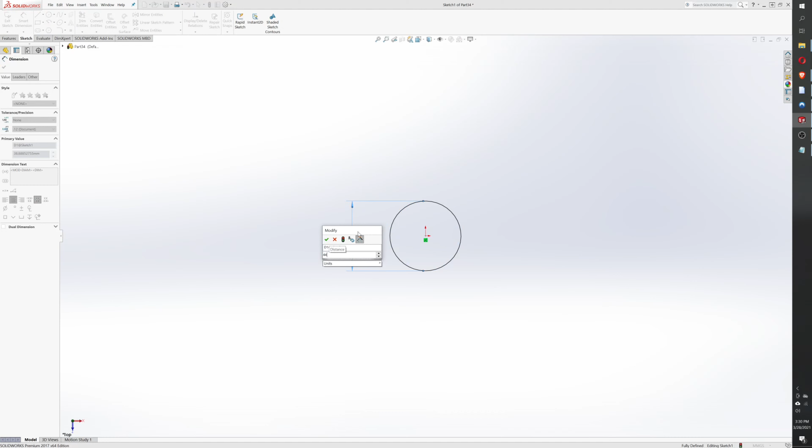Alright, so we're going to start by sketching out the shape that we want, which is going to be a cylinder. So I go to the top plane, draw a circle. I want this to be 44 millimeters in diameter and 200 millimeters tall, so we'll extrude it by that much. And that's going to be our rough shape.

Now I want to build some channels along the edges of this so that I have something to feed my tubes into, but I don't know exactly where I want them yet. So what I'm going to do is start by sketching a circle here. This is just temporary. This is to represent the interior of the container once I hollow it out. Then I'm going to sketch another circle here, and this represents the interior of the channel that I'm building, which is going to be 6 millimeters.

And what I want is for this to just barely intersect this. And the idea is I want there to be a little gap in the wall between the main chamber and these chambers, but not to have that gap big enough to pull the tube through. And I'm really just eyeballing this and seeing what looks right. So I just want this to be very small, a little bit further than that.

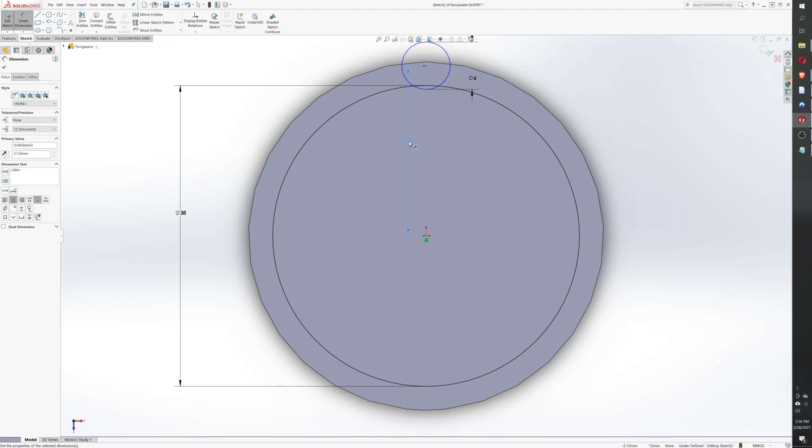Alright, 21.5 looks good. So I no longer need this circle. We'll get rid of that. And that got rid of my measurements, so I'm going to put that back in. And 6 millimeters was the interior. The exterior is actually 12 millimeters, so I'll do that. So I don't want to just extrude this down because I want it to curve in.

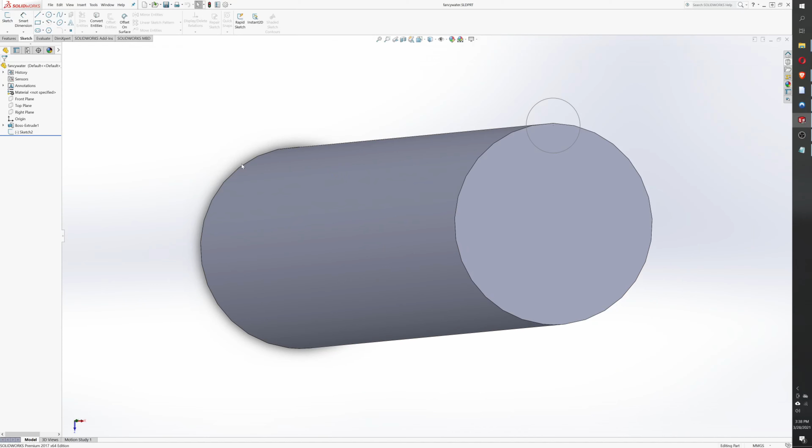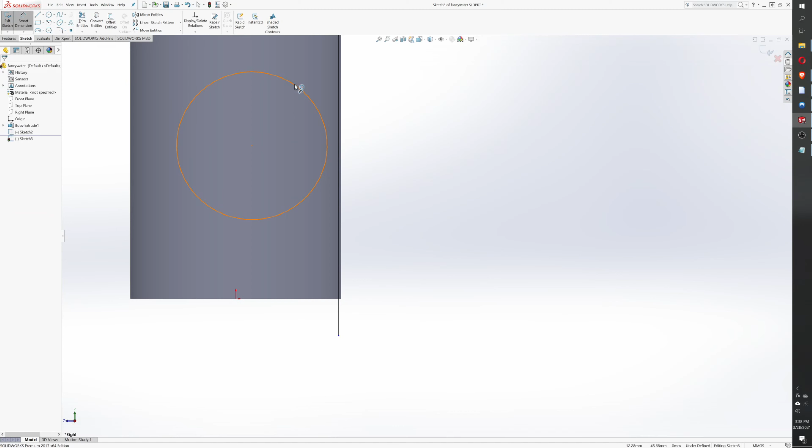So what I'm going to do is go to the right plane, and I am going to start a new sketch and just draw the path that I want it to take. So we're going to start in the middle of this and just go straight down. I'm going to take it further than I need and just cut off the rest later. Then I want it to curve in, which I'm going to represent with a circle. I want the curve to be about 15 millimeters high, so I'll set this to 30. And I want it to be 15 millimeters away so it just intersects.

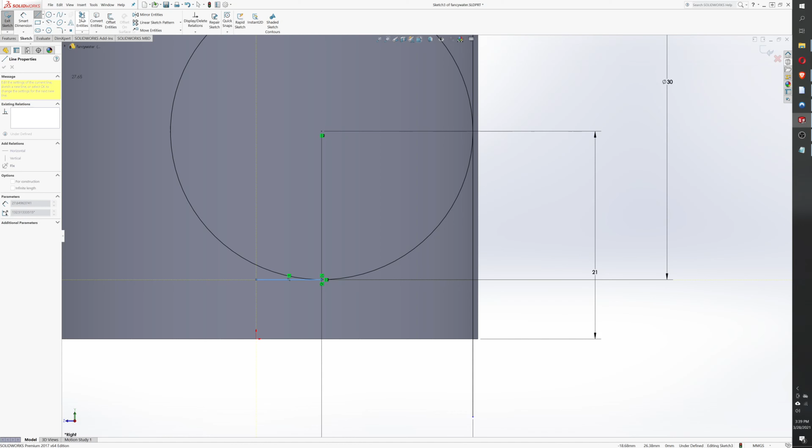I don't want it to intersect the bottom, I want it to come within, I'm going to say 6 millimeters of the bottom. So we'll say 15 plus 6. And there we go. And I want the path to go all the way to the middle of the model. Now we're going to grab the scissors and just cut away the parts we don't need, and we should be left with the path we want it to take.

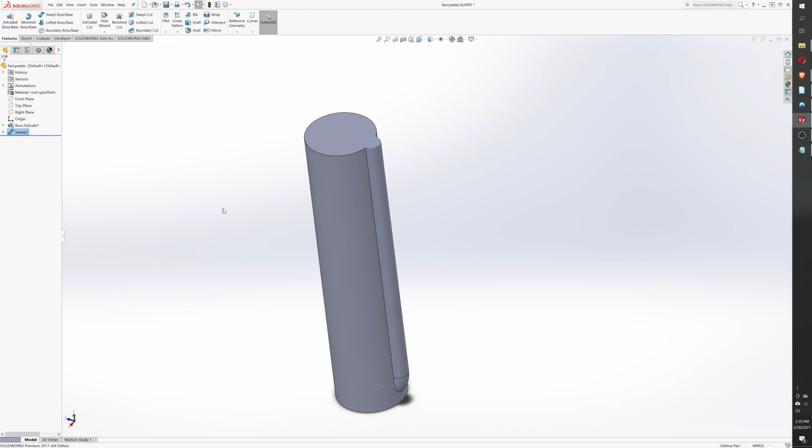So now we are going to exit that sketch, grab the circle that we made earlier, do a swept boss. It's asking us what path we want to take. It's going to be this path. Okay, that, and we're good. And I actually want a total of 11 of these, so I want 5 on each side. So I'm going to select the first one. I'm going to change linear to circular pattern. It's asking me for the path, so I pick that circle, and 6 is good because I want 5 on each side, and it counts this one as the first.

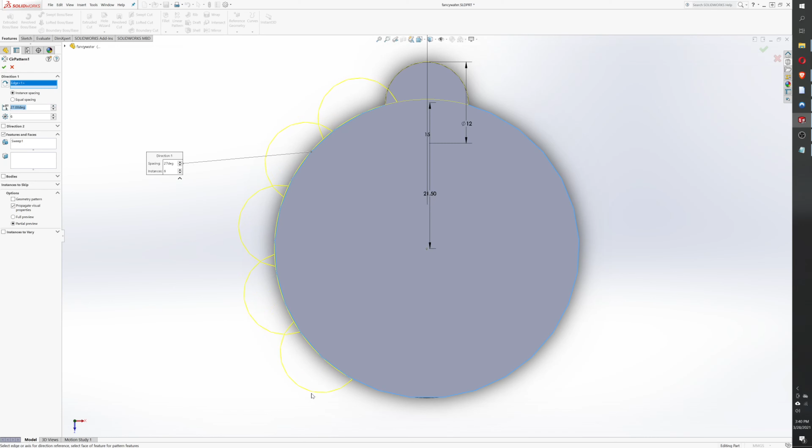But 15 degrees is a little too tight, so I'm going to increase this until it looks right. What I'm looking for, I don't want this to get further back from there. So actually I think 27 looks pretty good. And I want it to be on both sides, so I'm going to check off direction 2, symmetric, and OK.

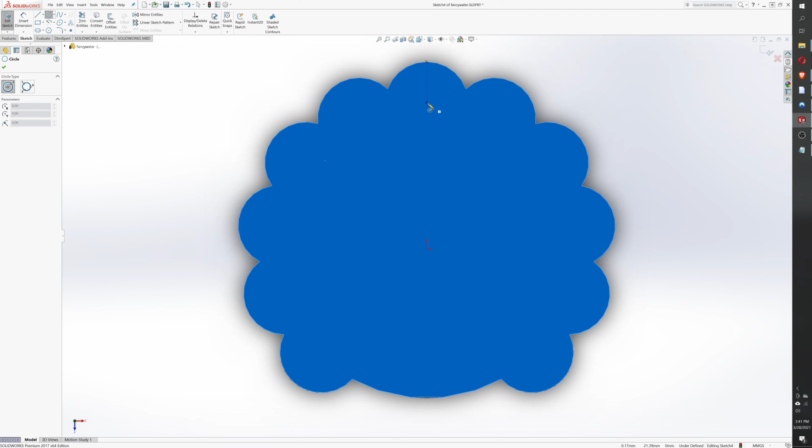Now I want to cut the holes into this for the tubes to actually go, so I'm going to start a new sketch. Draw a circle right there. I said I want the interior diameter to be 6. Now, I don't need to draw the path this time because I drew it last time, so we're going to keep that selected and pick swept cut. It's asking me what path I want. I'm going to go to my earlier sweep, select its path, and OK that.

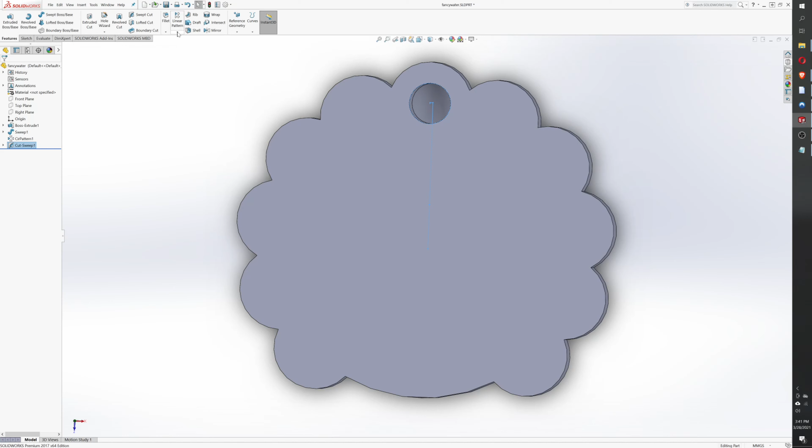And that's what we want, but we want 11 of them, so while it's still selected, circular pattern, select the circle. What did I say? 28, right? So we're going to keep that 6. Sorry, 27. And symmetric on the other side.

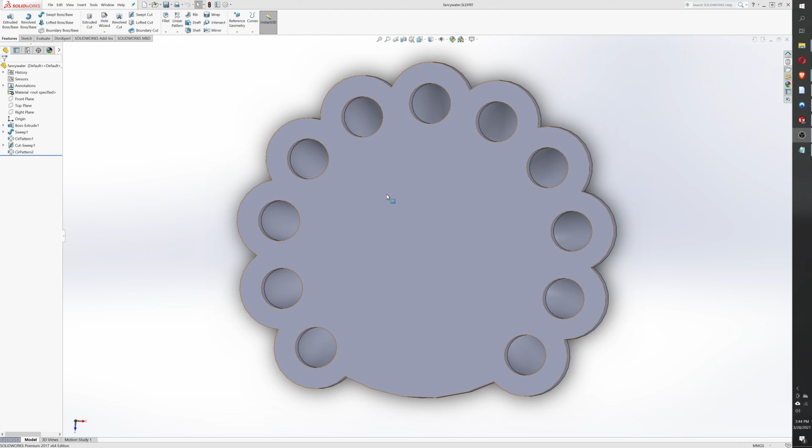Next, I want to hollow this out so that it can actually hold water. I could just do another circle here and extrude it down, but that's going to give me a flat bottom, and I kind of want it to be rounded out at the bottom. So I'm going to go to the right plane.

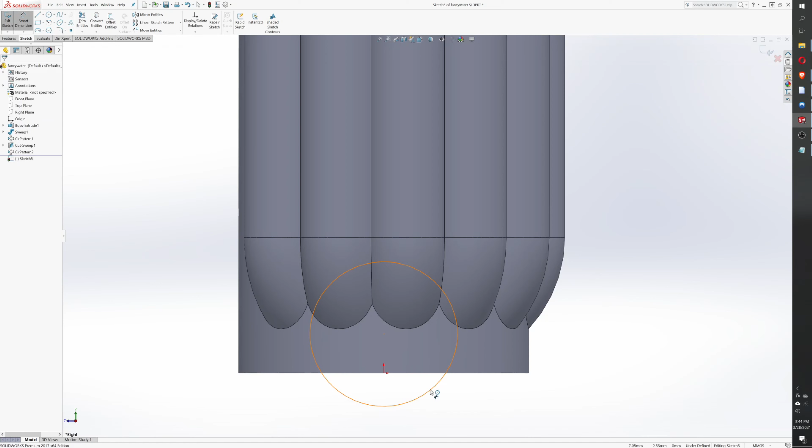What I'm going to do is a revolved cut, so I just have to basically draw a cross section of what I want, and it'll spin that around for me. Now I want the bottom to be round, so I'll do that. The interior diameter is going to be 38 millimeters. If I do 19 from the bottom, it's going to just hit that. Now, I don't want it to hit that. I want it to be 1 millimeter above where these tubes hit, and these should be 3 up, so I'm going to add 4 to that, which gives me 23, and that's right where I want that.

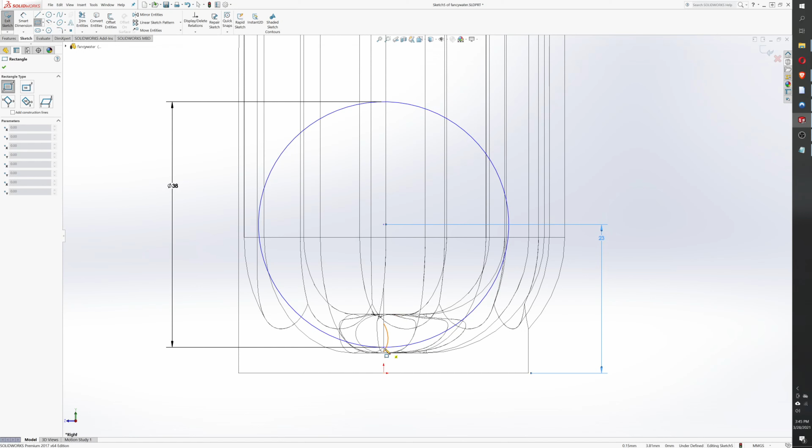Now I'm going to take my box tool, pick the bottom of that for one corner, all the way to the top, and then we're going to take our scissors and just cut away what we don't want, which is going to be this, this, and this. And that's going to be the tool we use to cut with.

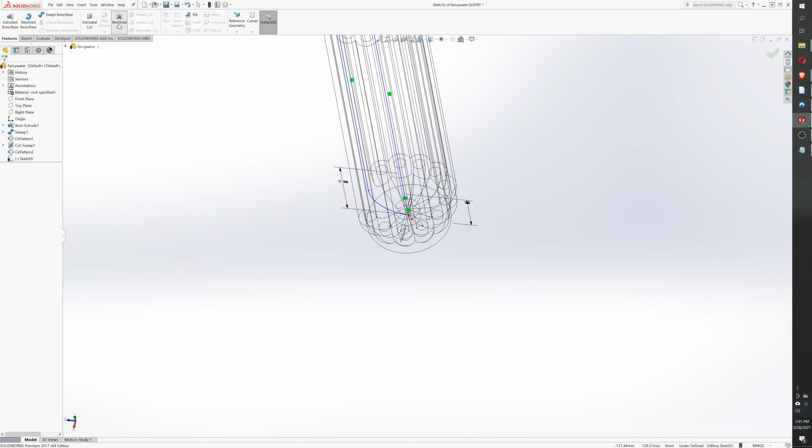So let's go to here, Revolved Cut. It's going to ask me what axis I want to rotate it around. It's going to be the middle right there. Okay, that. Let's give it back its skin and see what it looks like. Alright, that's what I wanted.

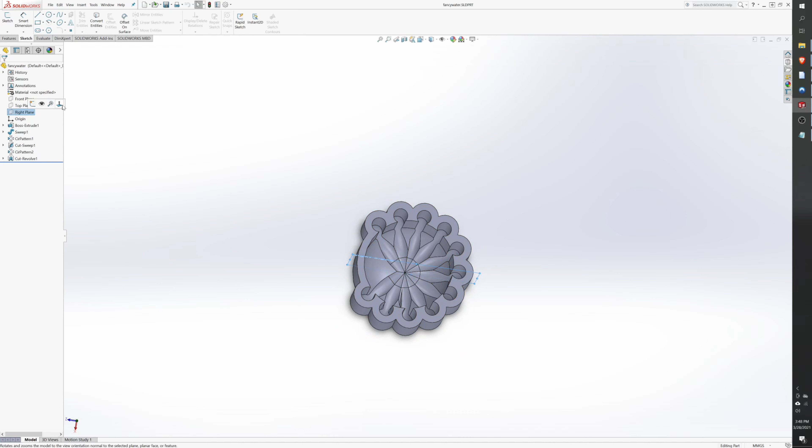Now I want to put a little bump somewhere in the middle just so I don't have water pooling in the center, and it just kind of flows off to the side. So I'm going to go to the right plane again, start another sketch, and let's put it in X-ray mode so I can see the inside.

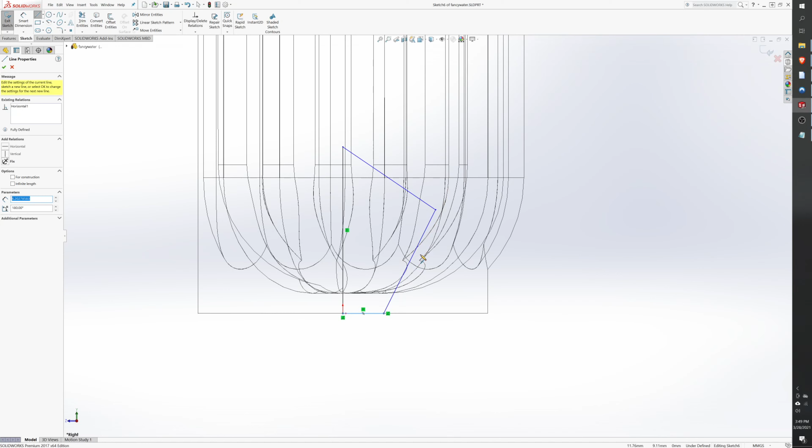I'm just going to kind of sketch out roughly the design I want. So I want it to have a slope that goes outwards, and I want it to have a little spiky thing there that goes in like this. The idea is I want the tubes to butt up against this and not be able to hit this perpendicular. So basically, there will always be a way for water to get in.

It looks pretty close to what I want actually, but I do want to make it a little smaller. So we're going to take the Smart Dimension tool. I'll make that 5. Let's have this 7.5. This is a little taller than I think I want to, so we'll make that 15. And I don't think I need this to be this steep, so we'll make that 20. That looks better, and we'll exit that.

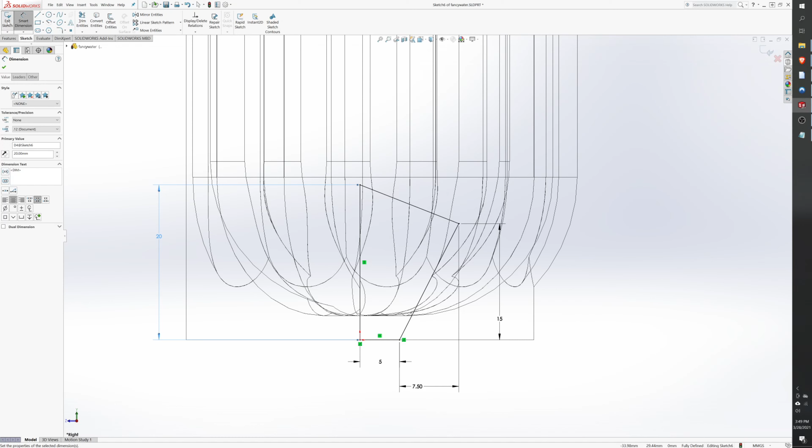While it is selected, we pick Revolved Boss/Base. Again, it's asking me for what axis I want to rotate on. It's going to be that one. Okay, that. And let's put the skin back on.

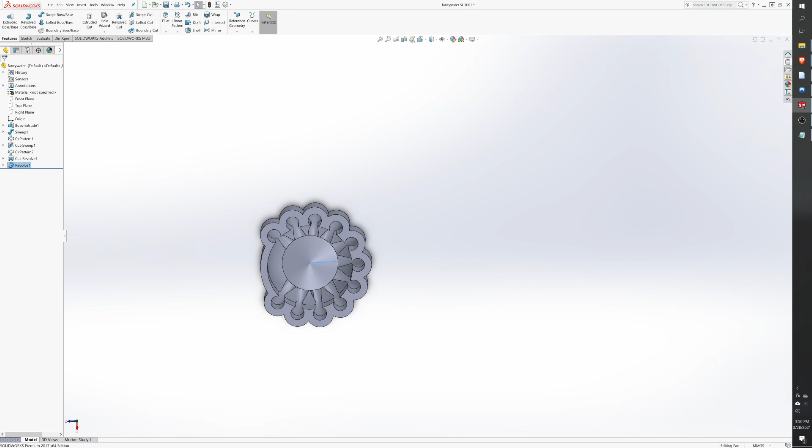Alright, so now water will just flow off of that and into my tube channels. So I actually only have 10 tubes that are going into this, but I have 11 channels, so what I want to do is use this middle one as an overflow pipe.

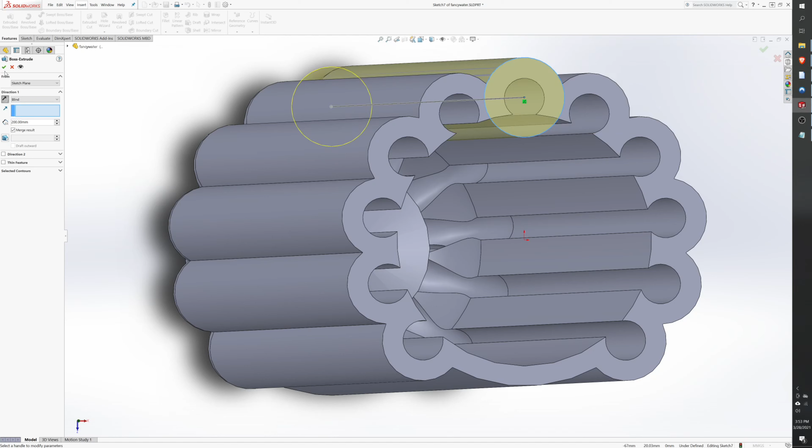So first thing I'm going to do is fill it in by drawing a circle over it, and I'm just going to extrude this all the way down to the bottom, which is 200 millimeters away. Why did I do through all? In the opposite direction. Now that that's filled in, I won't have water going in through this channel.

I am going to cut a hole. I want this to be a little bit smaller than my tubing so that if I try to stick tube in it, I realize I'm doing something wrong. So it's going to be 4.5 millimeters wide, and this one I will extrude through all.

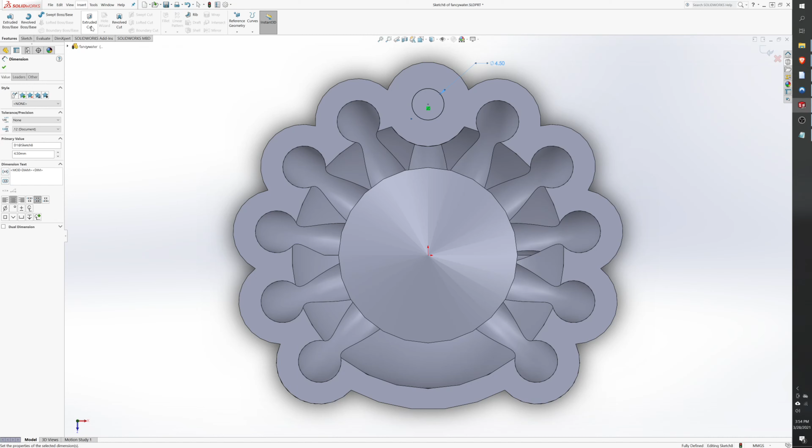Alright, so now I have a tube here, and any water that gets into this tube is going to flow out of here and land into a jar that I have strategically placed underneath it. I do still need to cut a hole into the tube so that water can get into that, but I will be doing that later.

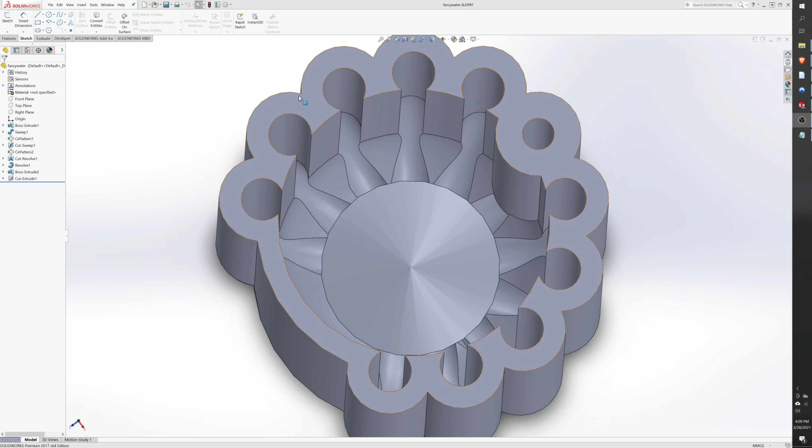Now I want to build some rails on the inside, and the idea is that I'm going to have a little styrofoam floater in here that's going to help me measure how much water is in the container.

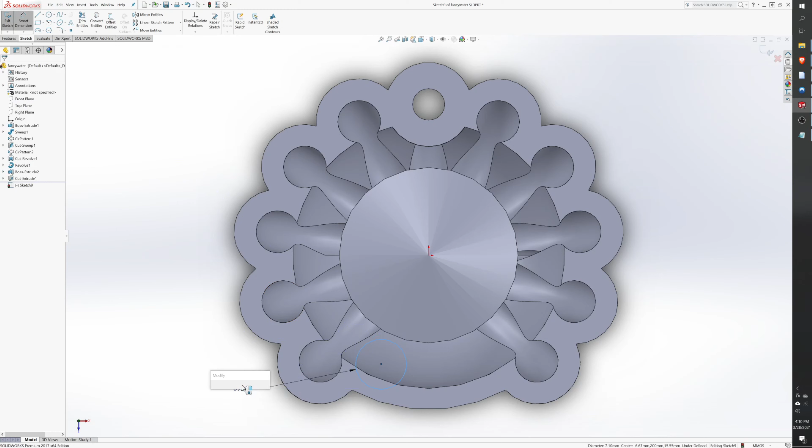And I think this is narrow enough that I can just toss it in and be okay, but just in case I do need some guidance, I want to have the rails already in there so I don't have to reprint the whole thing. I want this to be 7 millimeters in diameter. I'm eyeballing it at first, but I do need to know the exact measurement because I may need to use this to model something. I want it a little further. Alright, so now if I need to model it, I can use these dimensions and I will get it precisely.

I want another one on this side. Also 7 millimeters. And also 6.5 away. Then I want another one up here where the drain is, but it's going to look a little different. So I want it to be, I'm going to start as a square.

I want this to be about 5 wide, so we'll do 2.5 there. And misclicked. 2.5 there. And this I want to be, let's go with 13 millimeters away. I think that looks good.

Alright, now I want to cut little notches in the middle of them, just so I can have a little guide peg. So one will go there. I want this to be 2 millimeters wide, so that'll be 1 on either side. Yeah, you know what? I'll just go all the way into there. And we'll just trim away the extra.

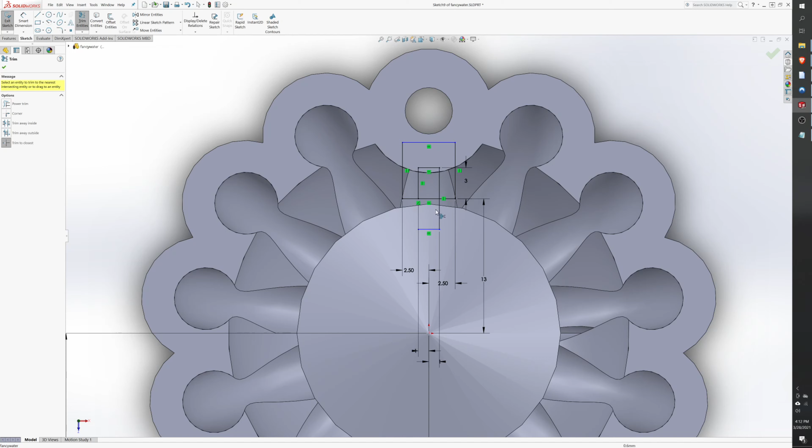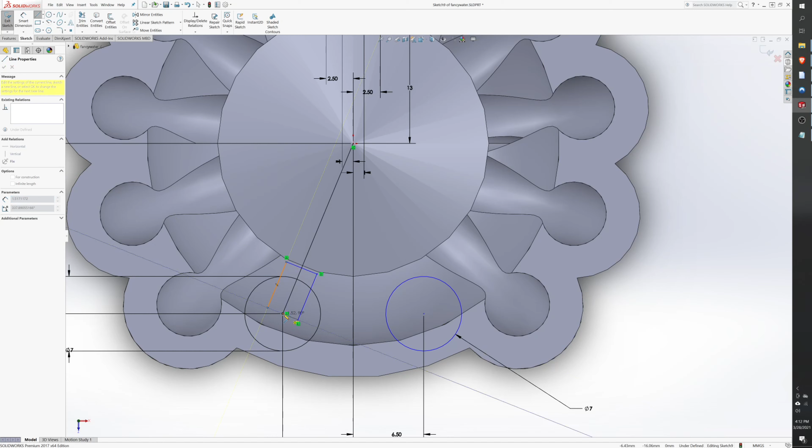Alright, and now for the bottom ones. These are a little trickier just because they're at an angle, so I'm going to start by drawing a line from the center of the piece to the center of the peg. And I'm just using the yellow guidelines to draw this out. And then again for this one. And of course I'll use my trim tool later to fix this up. Alright, and I want these to also be 2 millimeters thick.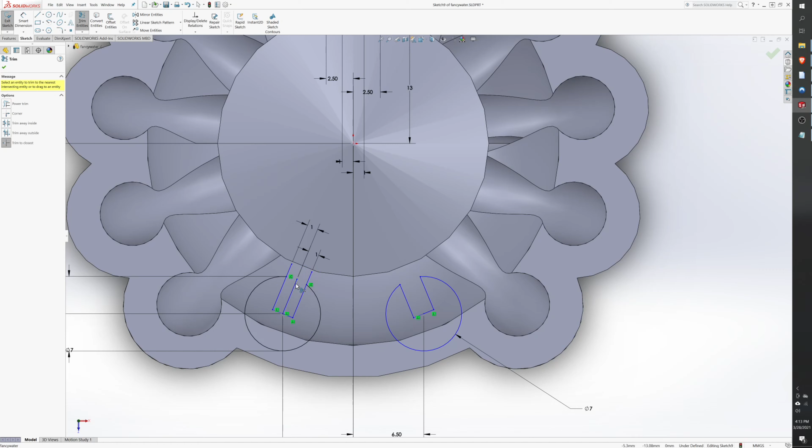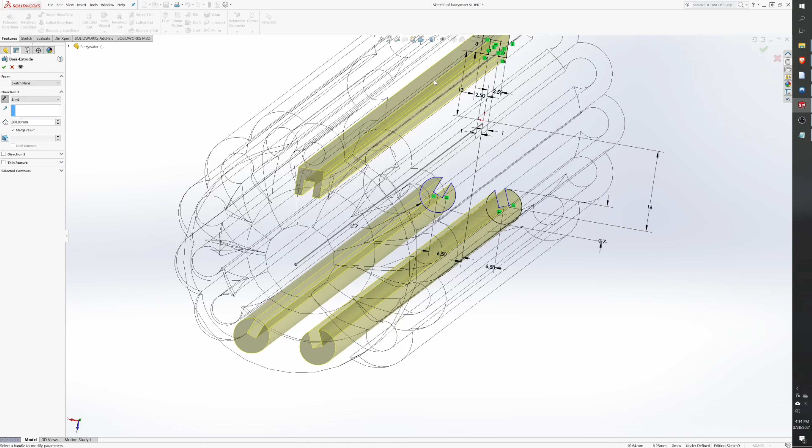And now we're just going to trim away what we don't need. And now we just extrude this down and we should have our rails. That's going to go 200 millimeters in the opposite direction. Just want to make sure it's not poking through anything. Cool. And okay that. And here are our rails.

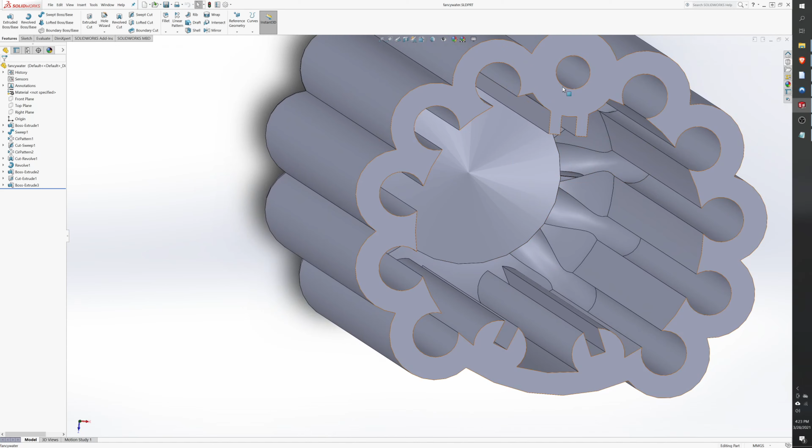So now that I have my rails in place, I want to cut the overflow entrance. So basically I want to poke a hole right here, and that's going to go through the rails as well, which is why I wanted to wait. And then if the water gets high enough, it will flow into there and flow out. So I'm going to go to the front plane, and I'm just going to draw a simple circle. Going to make it 4.5 millimeters wide.

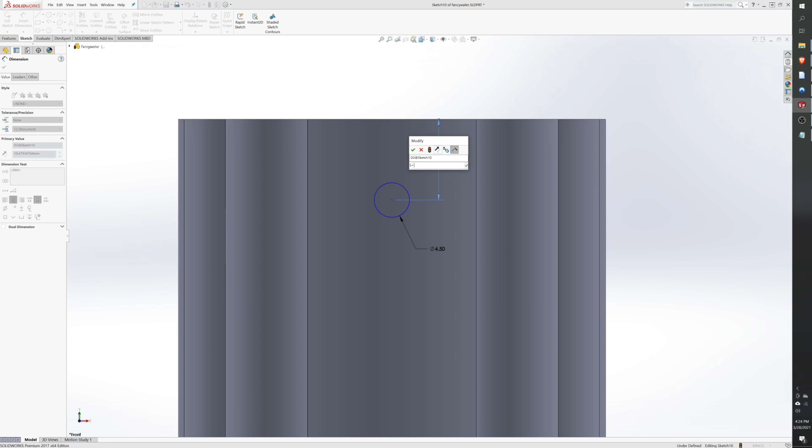Same as the actual overflow thing. Now I'm planning to have a lid for this, which is going to hold some electronics, and that is going to come about 5 millimeters in. So I want the top of this to be right up against that. So that is going to be 5 millimeters plus half the diameter, which is 2.25. Alright, and now we are going to do an extruded cut. And this should be, what did I say, 21.5, I think? Yeah.

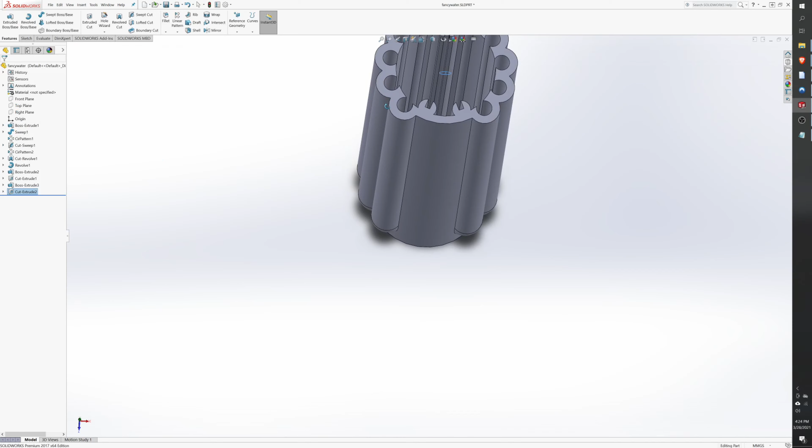Cool. And there is our overflow. So if the water gets this high, it's just going to flow in there and flow out instead of flowing onto my electronics. So the last thing I want to do is give myself a way to mount this.

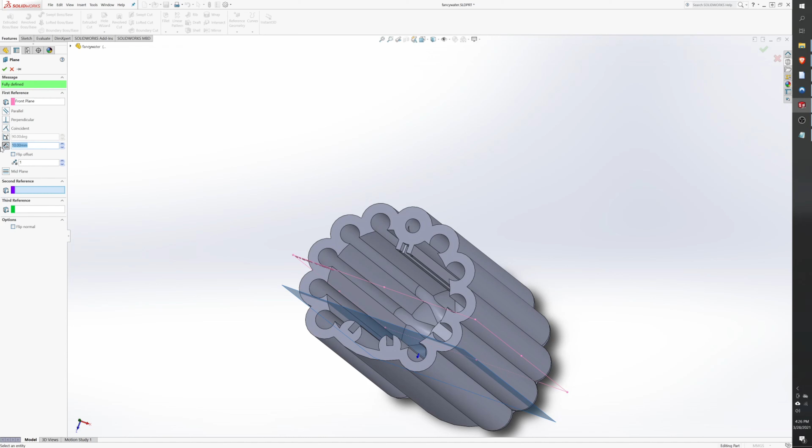So I'm going to go to the front plane and create a new plane. I want this to be right up against the edge of this. So this circle is 44 millimeters wide, so I want it to be 22 off center. And yeah, that is where I want it.

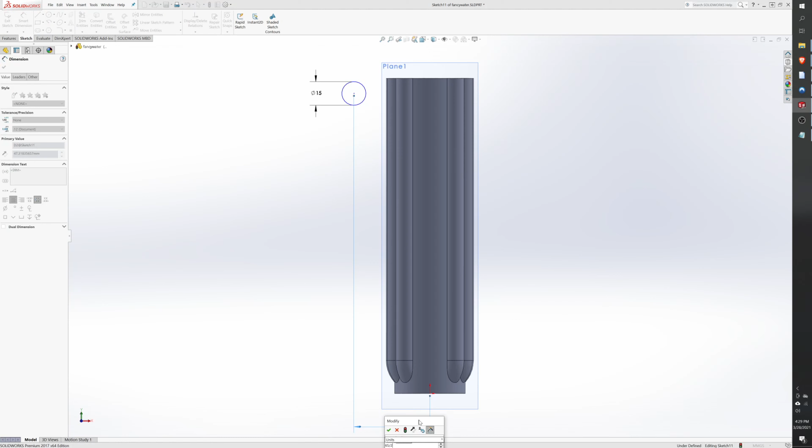So now I'm going to go to that plane and I'm just going to sketch out what I want. So I'm going to start with a circle. This will be 15 millimeters wide, and this is going to be the thing that I put the screw through. So I know I want the screws to be 65 millimeters apart, so it should be 65 over 2 away from the center. And I think I wanted it to be, let's say, about 20 down from the top.

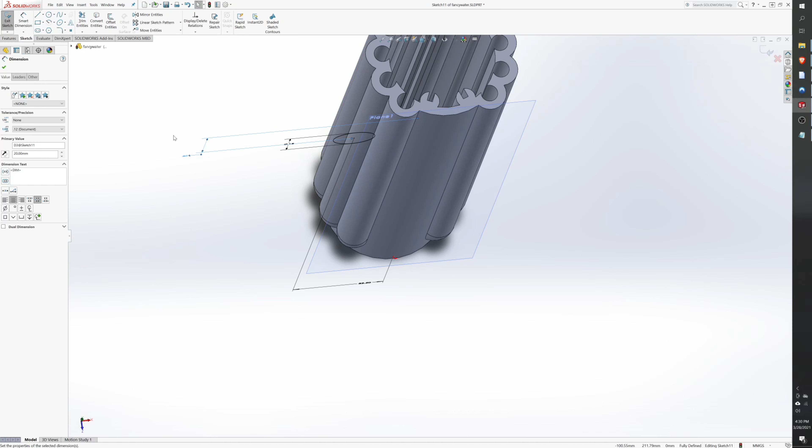Alright, so now I need a way to connect this. So what I want to do is kind of draw like a wing thing that goes into here and just give it like a nice sloping angle. And since this is rounded out, that'll just kind of gradually mesh with it, and it should look pretty nice. And support the weight. So let's go back to sketch. Using the spline tool, I'm going to do the top part first.

Don't want this to go to the middle. For the bottom, I want a steeper angle, mostly for my printer's benefit, so I'm going to start down here. I'm actually going to intersect a little bit of the circle, mostly just to keep a steep angle, so my printer's only got to go a little bit out over nothing each time. So we'll trim away this part.

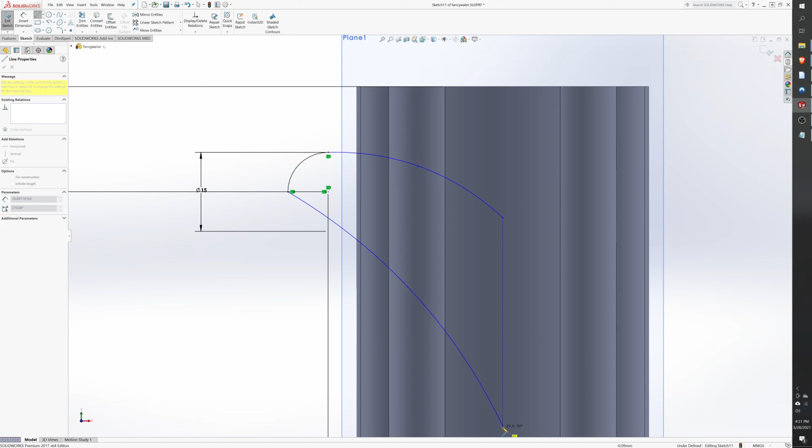And let's close this in. All right, so now we have our shape. Let's extrude this out. I want to go in the opposite direction, and I think 5 millimeters should be thick enough.

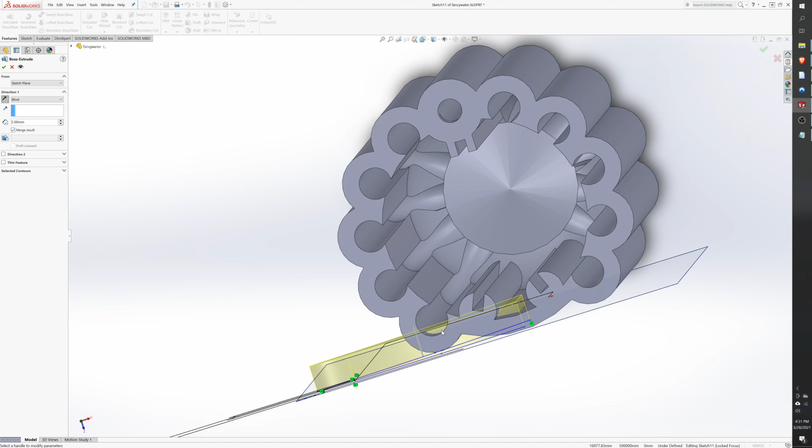Now this does intersect my channel a bit, and also the inside there, but that's okay, I'm just going to cut that out later once I've made them all. So we'll okay that. Now I want this to be symmetric, so while I still have it selected, I hit mirror. It's asking me what plane I want to mirror across, and that's the right plane.

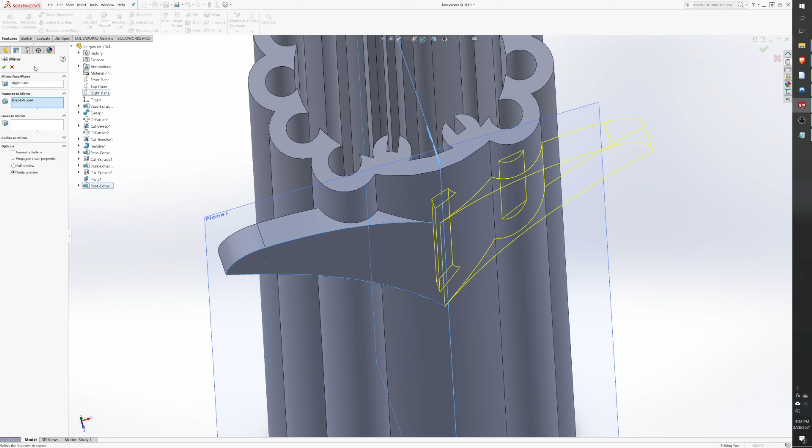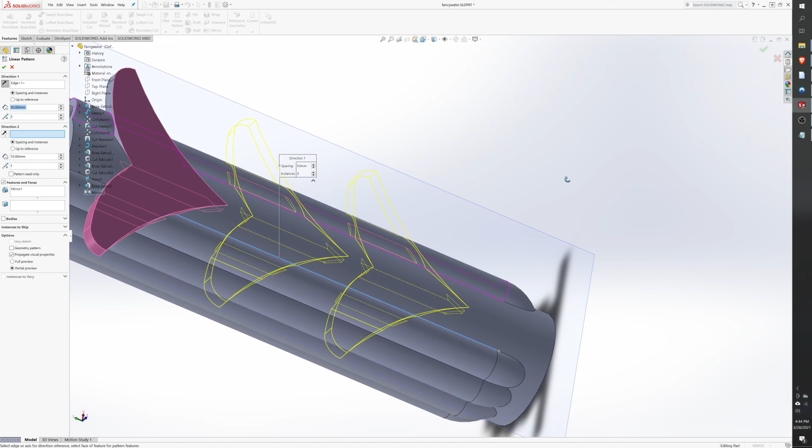And there we go, so I have my mounting brackets, but I want 2 more of them. So I'm going to select the mirror, go to features, and select linear pattern this time. I'm going to pick any of these vertical lines, and I want 3, but that's way too close together. I'm happy with that, so we're going to okay that.

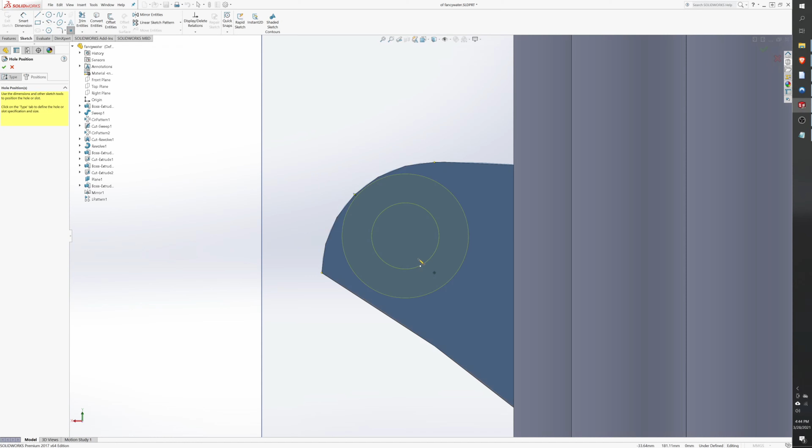Now I just got to put some drill holes in those, so I'm going to go to the front, select the hole wizard, pick the hole type I want, which is going to be countersink number 8, go to positions, and I'm just going to find the center of each of these and put that there. You'll see how it kind of looks like it's overlapping, which would be a problem for the printer if it has to go in like that, but that's just the outside of the countersink, so we'll be fine once it's actually drilled.

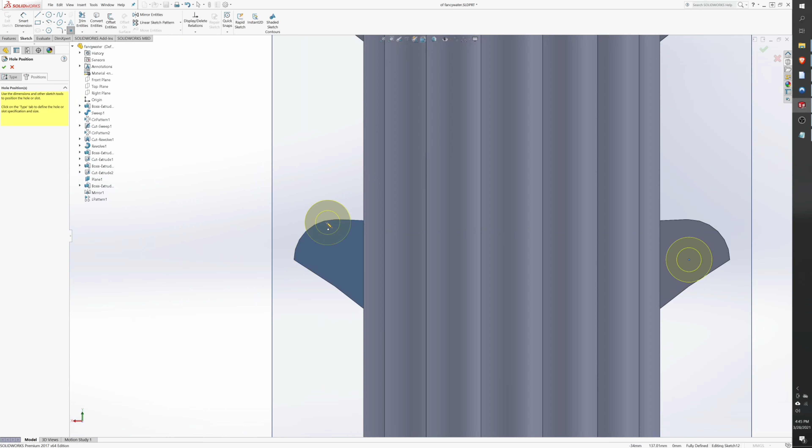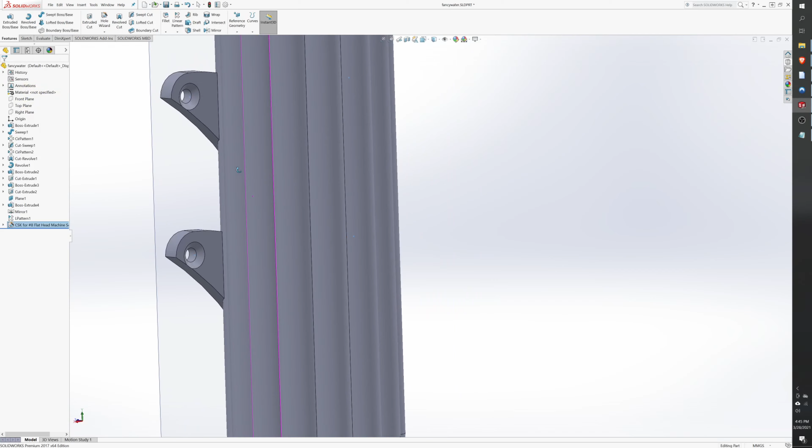One more. Alright, so they're in place. Click the check mark, and there we go. That is how we will attach it to the wall.

The only problem is you can see we got some stuff inside, so we're going to have to cut that away. So I'm going to go back to my top, and I'm basically just going to sketch out the parts that intruded.

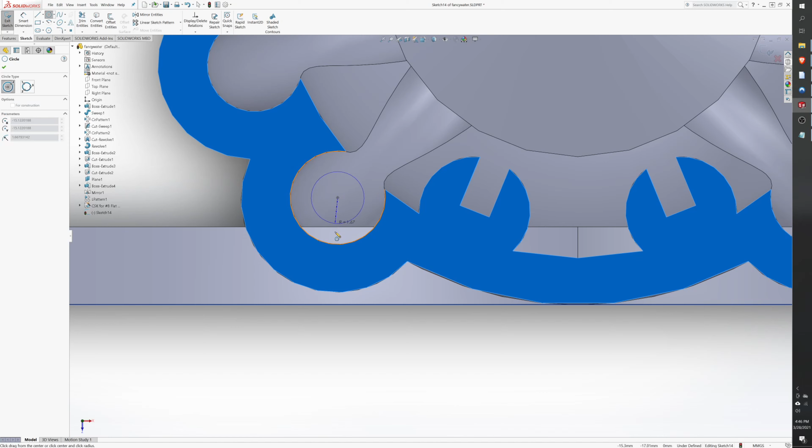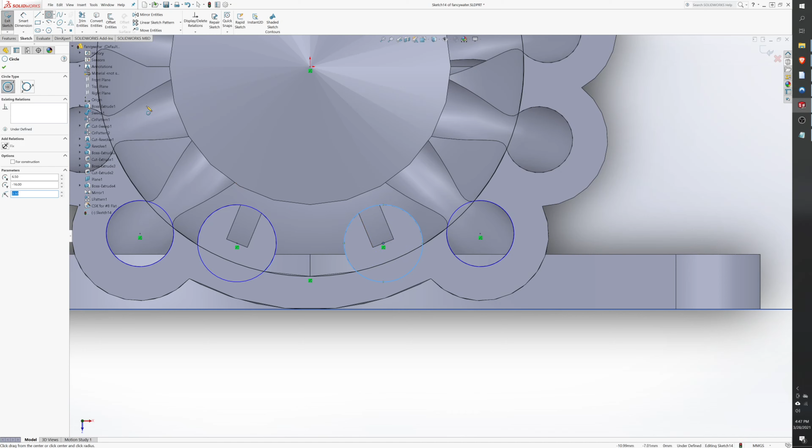Here. A little bit here. This part here is going to be a little bit more tricky, but basically I'm going to sketch each side of it, and then I'm just going to use the trim tool to cut the rest away.

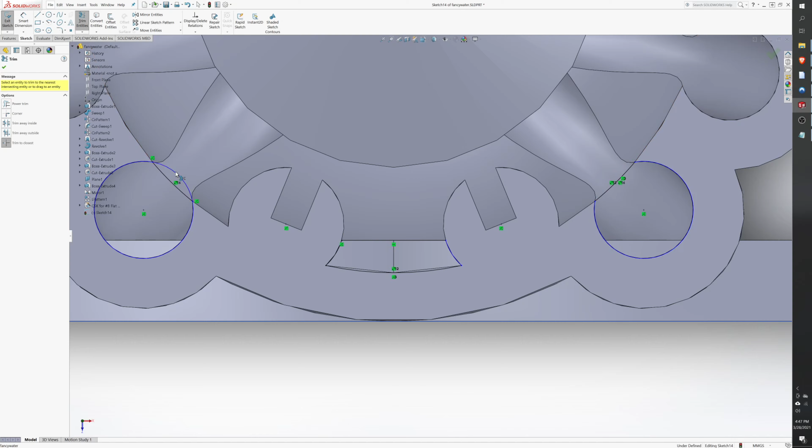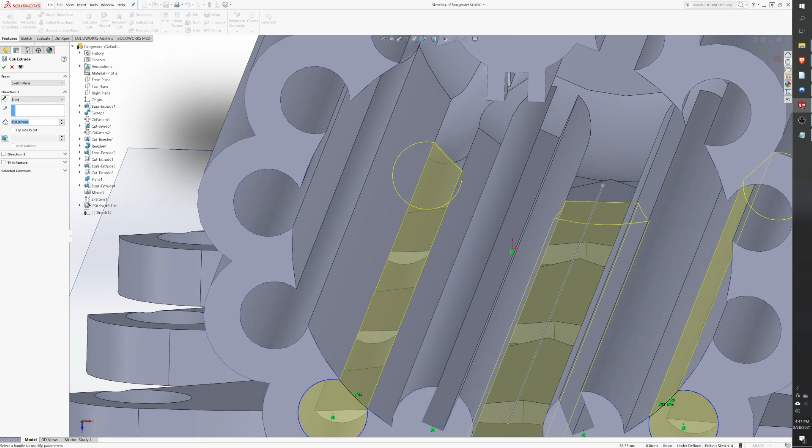Okay, we should be able to just do an extruded cut and get rid of all of that stuff. I want to go in far enough to get all of this stuff, but I don't want to mess up the curve towards the bottom. I think that works. Yeah.

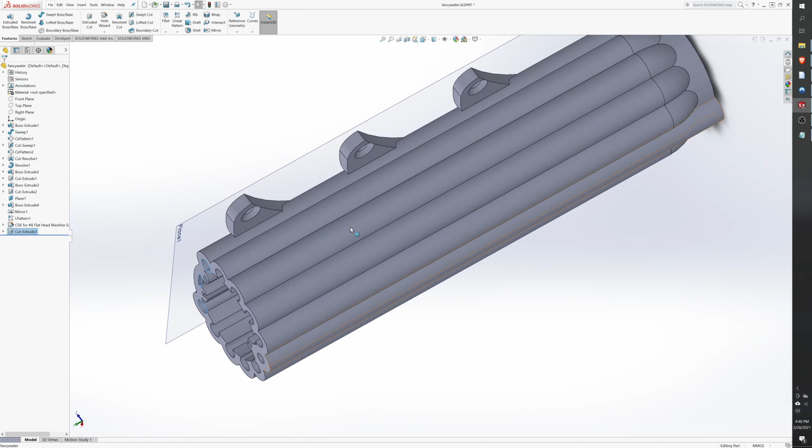So now it's not intruding anymore, and we still have the thickness we want. So I'm going to do one last visual inspection, make sure there's nothing that might not print the way I want. And I think we look good, so we're going to send it to Cura.

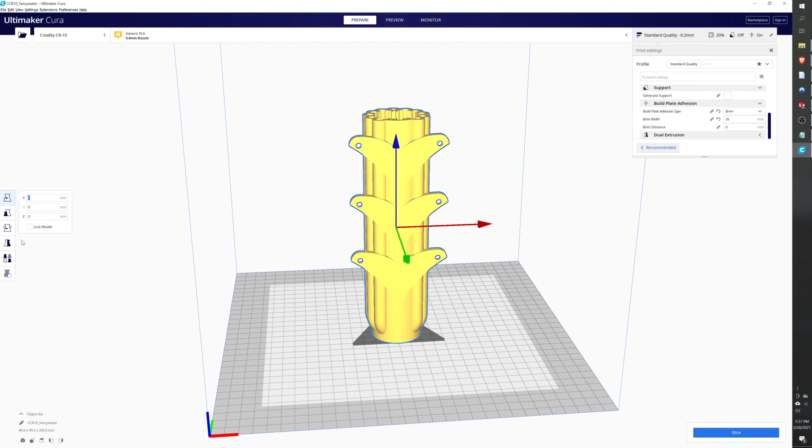Alright, so here we are in Cura. First thing I want to do is just face this correctly and move it into the middle of my build plate. Now I am good with most of the default settings. The one thing I do want to change though is the wall thickness and the top/bottom thickness. That's going to determine how many solid layers it prints, and I want to jack that up to 1.5.

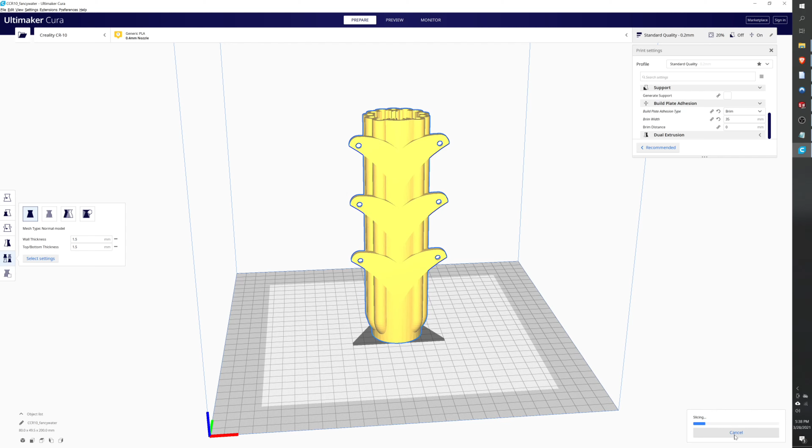Now unfortunately that's going to make this almost entirely solid. There's going to be a little bit of infill at the bottom, but most of the rest will be solid. So it is going to take frickin' forever to print, but hopefully it won't leak. So now we'll slice it up and send it to the printer.

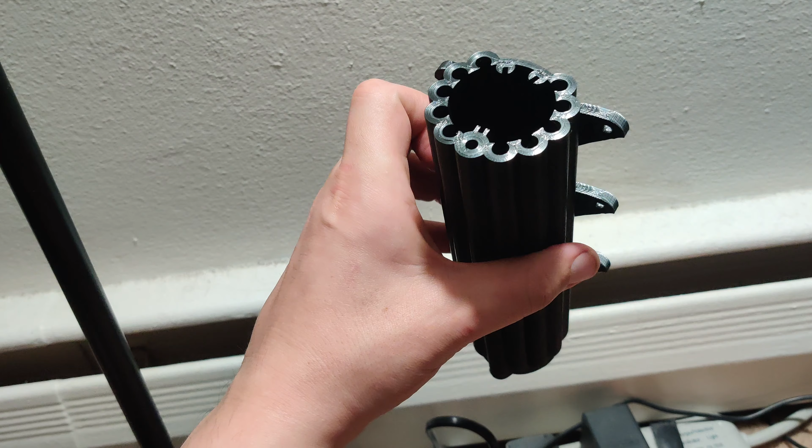So here is the printed out part. Pretty happy with how it came out. Details nice and clean. So we will print out the rest and get this installed.